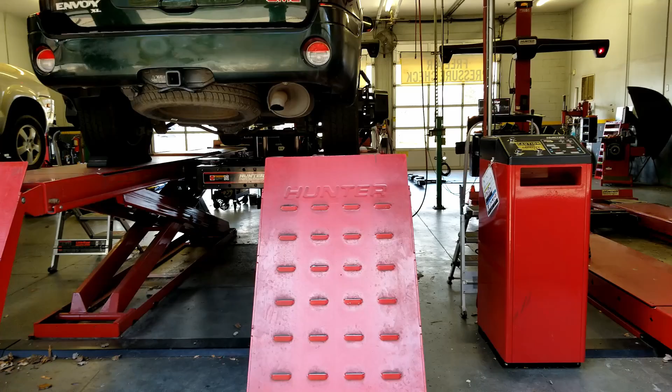Alright guys, so the car was in and out in about 45 minutes. Took them a little bit to get it back in the bay, but once I got it back there, it only took about 45 minutes to get done. So I was a little nervous when they brought it back in 45 minutes. But I've got the sheets here, I've got the diagnostics, the readings from the alignment rack. So we'll go over those here in just a minute. I want to show you guys.

I was actually mistaken, or I was wrong. I thought it was the camber, when in fact the misalignment was the toe adjustment. So I'll show you those numbers here in a minute.

So that alignment cost me, they were running a $10 off special today, and so all taxes and everything out the door was like $108, $109, we'll call it. So that wasn't terribly bad for a front end alignment.

However, and again, I'll show you this paperwork here in just a minute once we get back to the house, but they could not adjust the camber. The camber on the driver's side was off just a little bit, and they were not able to adjust it because they did not have the proper tools to do the work.

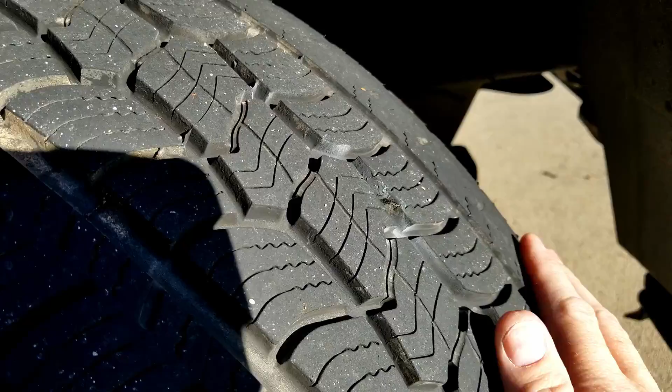Okay, so we're back in the driveway now, and I just wanted to show you the passenger side tire here to show you what it was doing, what the problem was, what the symptom of a misalignment was on my particular tire. I apologize for the shadows, but as you can see, the outside tread all the way to the center tread is fine. It's not until you get to this innermost tread section that is almost just worn down, slick.

You've got to keep an eye on your tires. I was admittedly kind of neglectful of my tires, rotating them, keeping air in them and everything, but this is what it looked like. So hopefully the alignment will take care of that.

Let's go take a look at the driver's side tire. That one is not as bad. You can see the driver's side tire is wearing a little bit on the inside here, but it is certainly not as bad as the passenger side.

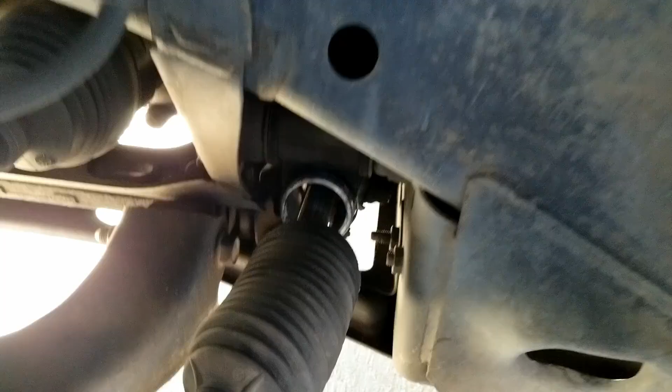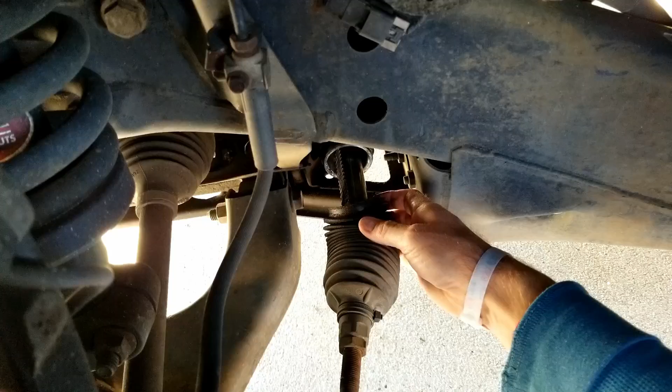Now, I see something going on in here that I do not like. Looks like either my bellow has ripped, or those guys just didn't put it back on properly. I'm gonna have to take a look at that. I don't think that bellow ripped, it looks like it's still got the lip on it. Just looks like it slipped off of the little zip tie I've got back there. So I'm gonna have to get that thing put back together so it just keeps the dust out.

I'm gonna check on this passenger side too, and of course I can't see it, but no, that one looks fine. Let's see if I can get you guys in there. There's that one. So that one looks good. It is just that driver's side bellow that has come off. So we're gonna have to get that fixed.

But anyway, let's take a look at this paperwork now.

All right guys, so there is the paperwork, and we're going to dive into that.

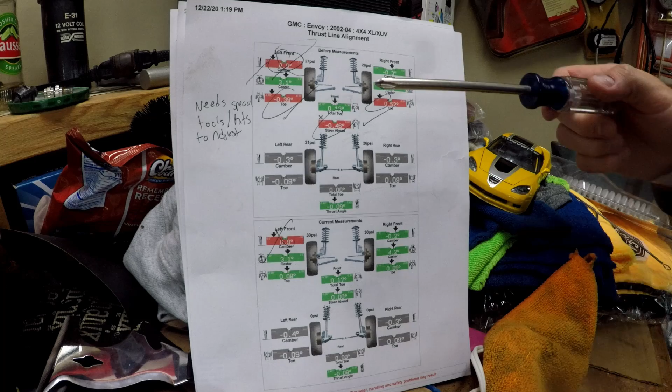Alright guys, so let's take a look at these numbers here from the tire shop. I just had them do a front end alignment. These numbers up top are the before, as I brought the car in.

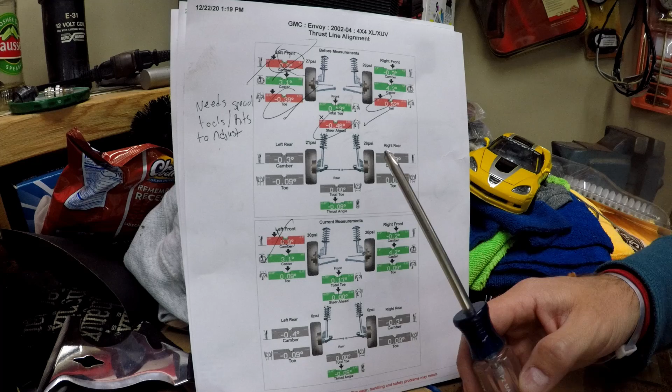You can see we've got several numbers in green, those are all good. My caster on both sides is good, the camber on the passenger side is good. Camber on the driver's side was a little bit out of spec by about a degree. I'll talk more about the camber in just a second. Then the toe, you see the toe on the passenger side was about half a degree inward, and on the driver's side was about minus 0.4 degrees outward. And of course my steering was off by negative almost half a degree.

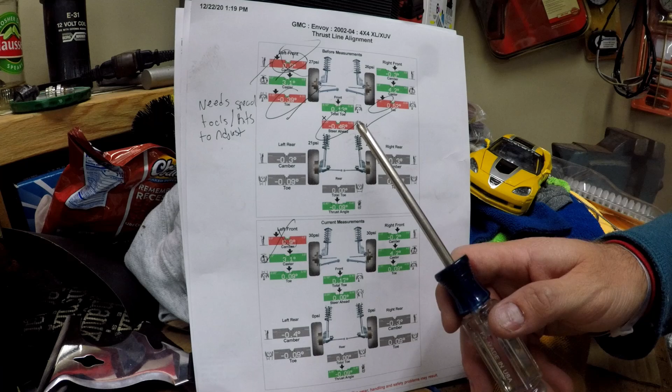So the biggest problem here for my car was the toe adjustments. Looks like the passenger side was towed in, and the driver's side was towed out.

Now for the camber, you see they've got this note here: need special tools kit to adjust. This is what I was talking about in my previous video about alignment shops maybe not being able to adjust the camber on these cars.

Like I said before, the camber and caster on these cars is adjusted by loosening the lower control arm, which is held on by 3 bolts. Then you adjust it once it's loose, and it's an iterative process, and once everything is in spec, you tighten it back up. Now there are specialty tools that the alignment shop needs to have, well, maybe not necessarily needs to have, but should have to do it properly. And according to that note right there, they did not have the specialty tools, so they could not adjust the camber on my car.

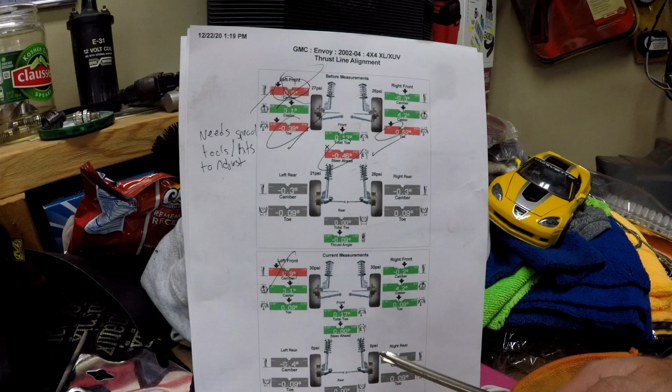So after the guys put my car on the alignment rack and got everything adjusted, you can see here everything with the exception of the driver's side camber is now within spec. So the steering is right at 0, that's bang on. Camber, caster, toe on the passenger side is good, and the caster and toe on the driver's side is good as well.

Hey folks, hope y'all are having a great day. So I am back here at, where are we at, there we go, back here at Just Tires, day 2, to try and get my alignment fixed.

Really it was the camber that was giving the problems. I wanted to give a shout out to the store manager at this store, because what had happened was, if you remember from earlier in the video, my first attempt at getting the alignment fixed, the technicians told me they could not adjust the camber and caster because they did not have the specialty tools. So I went on Google and posted a brief review on this Just Tires website, and I gave them a 3-star review.

I had to give them some credit, because they made an attempt and they were able to adjust the toe and get that all dialed in, but just not the camber. So I left a 3-star review, saying if you guys had a GMC Envoy, Trailblazer, whatever, you may want to find a different shop. And didn't think anything of it.

Then, within the hour of posting that review, the store manager of this Just Tires actually called me personally, and I was a little surprised. I was really surprised that not only do they actually read those reviews, but he reached out to me just to understand what my concerns or issues were with the service they gave me yesterday. The result was he invited me back today, told me they had some availability, and if I could get the car in within the hour, they could get me right in and take care of it.

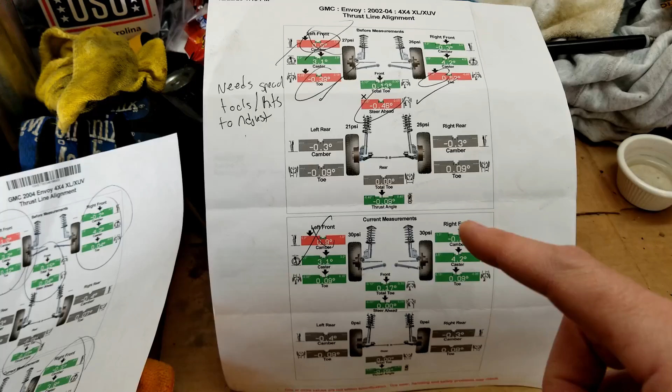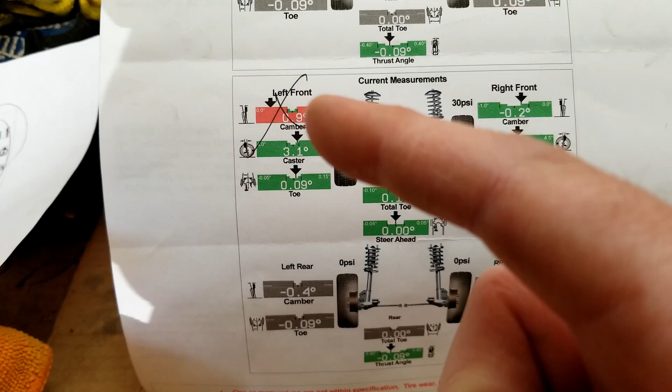All right guys, coming back to these numbers real quick. This was the first day, or first attempt, when I took the truck in to get it aligned. Here was my starting point - obviously the toe, camber, and steering were off, we talked about these a little bit ago. This was the first time they aligned it - they were able to get everything in alignment except for the camber, which is what we were talking about earlier.

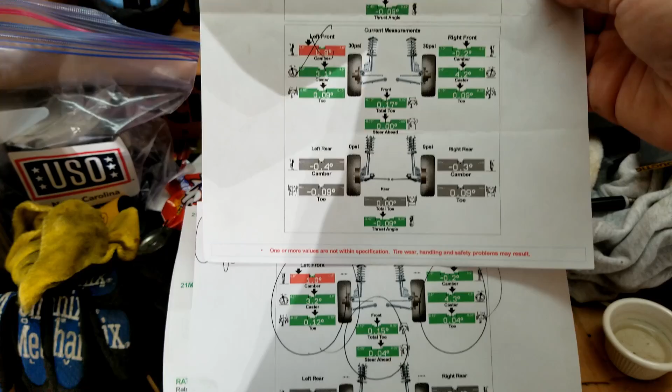Once the store manager called me and asked me to come back, this is where we ended up. So this is the progression of the alignment. You can see the camber on the bottom of the first page is off, it's in the red. Come down to the top of the second page - again the camber was off, this was the starting point of the second day. Then we come down to the end point of the second day, and the guys were able to get the camber, the caster, the toe, the steering, and the total toe all in alignment. So everything is now good to go.